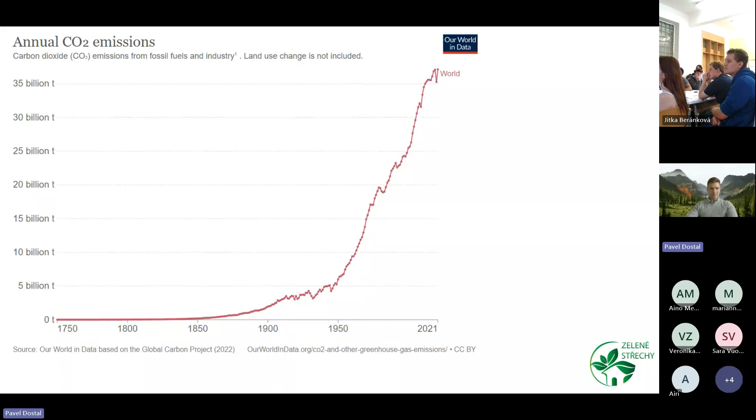So where we are right now, we are at a rather unfortunate point of time in history, where we realize how much CO2 emissions we have actually pumped into the atmosphere. And we realize that it's not sustainable. It cannot go like that. We're already seeing consequences. There is a 99.9% consensus of science that the CO2 emissions are human-made and are contributing to climate change. Although we might still be hearing some voices, especially in our country, which try to object to this, there is a really strong consensus.

And the green roofs, just like any other plants, can actually sequester carbon and can help us using low-tech solutions, using natural solutions. They can help us get back on track, and we desperately need that.

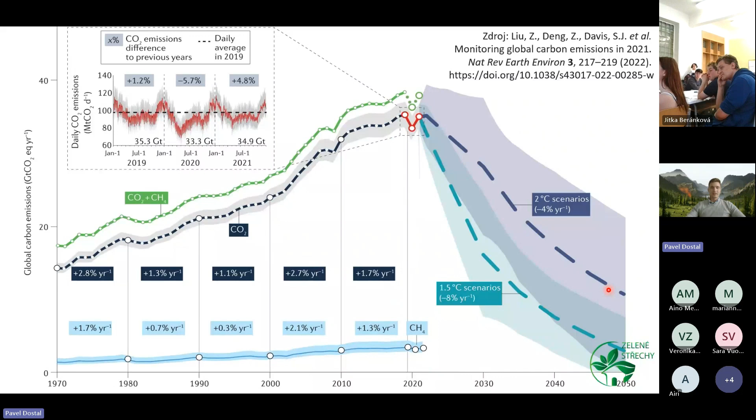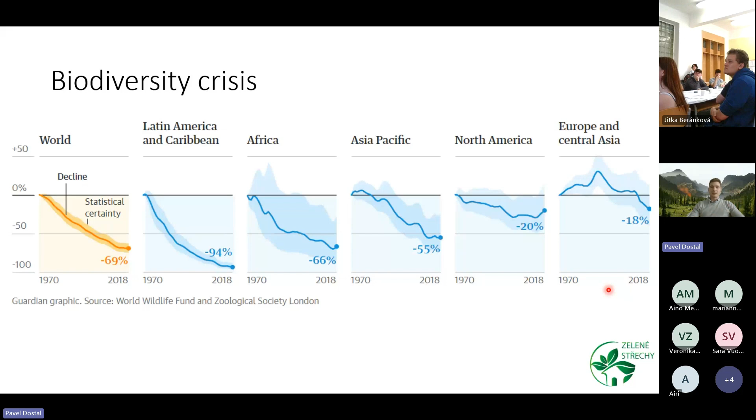So the climate crisis is not the only one that we're facing. We're facing also the biodiversity crisis. So the loss of biodiversity across continents in the world, in some continents more severe, some less. But here again, green roofs and green infrastructure can help us address this topic, because we can specifically create habitats which we know are being destroyed in nature, and we can compensate in the built environment for that, and also in the agricultural land, but I'll focus on the urban environment right now.

Now, for some of us seeing these pictures, these charts, it may seem a little bit heavy, and we almost feel anxious. But I'd like to know how you actually perceive this, because everybody has a different perspective on this, and I've asked this question a number of times at different venues and different audiences, and I'd really like to know what your opinion on this is. So if you can use your Menti again on the smartphone, and here I see that I have not translated it actually.

So anyway, those of you who want to vote, just feel free to let me know, and we can see some statistics there. And in case you don't understand the answers, which I unfortunately have not translated, sorry for that, we can skip this. So I don't see any answers there, so we'll just skip this.

But I'll give you an interesting observation that I had, because I've asked this question at a landscaping school and to civil engineers, and the future landscapers were slightly more anxious seeing the charts, and the civil engineers were really balanced. So some of them were totally fine and unaffected by climate change, and some of them were slightly worried, which also tells us something about how engaged the key stakeholders are with respect to what we need to achieve.

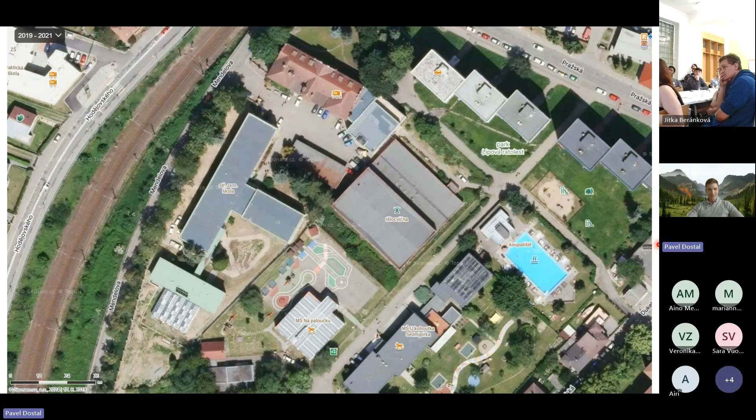So anyway, this is the school, your school, or the school that you were visiting. You can see the environment of the school. You can see how many green roofs there are, how many there are not. And looking at it from this perspective, we realize that the more we build, the more we actually need greenery. The more greenery becomes scarce, and we need to compensate for it in the built environment, which is, I think, a no-brainer, but still sometimes we need to remind ourselves that civil engineering development is not really a panacea. It will not bring by itself what we're looking for.

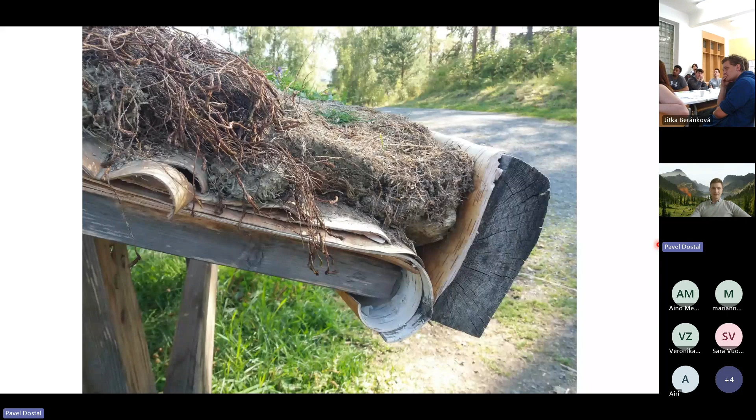Fundamentally, in Norway or in Scandinavia, you have a different rainfall distribution, for example, or even the total volumes of rainwater are different throughout the year. And the temperatures are really different, and the whole climatic zone is totally different. So the result is likely to be very different, and that's why in our Central European climate, we adhere to this idea of a green roof buildup, which is the case for flat roofs.

That's not the case for pitched roofs. They have a different one, but for flat roofs, the vegetation buildup is usually composed of these layers. So the vegetation, hopefully some which is local or typical and long standing. Then the vegetation layer, which tends to be the substrate, and the filter layer, protecting fine particles from entering the drainage and water accumulation layers and clogging the drainage system.

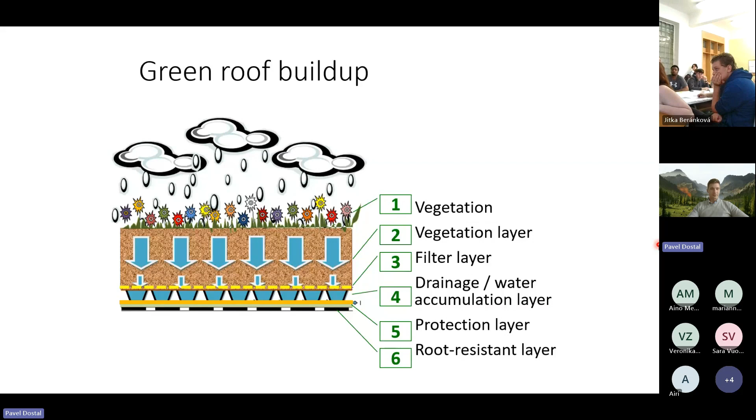And then underneath that, the protection layer, which tends to be a geotextile fleece, and the last important layer, which is done and has to be done by the engineering companies, is a root-resistant layer, which is in most cases the waterproofing. So a waterproofing membrane or bitumen belt or any other really well done waterproofing, because if it's not well done, the plants are going to find out.

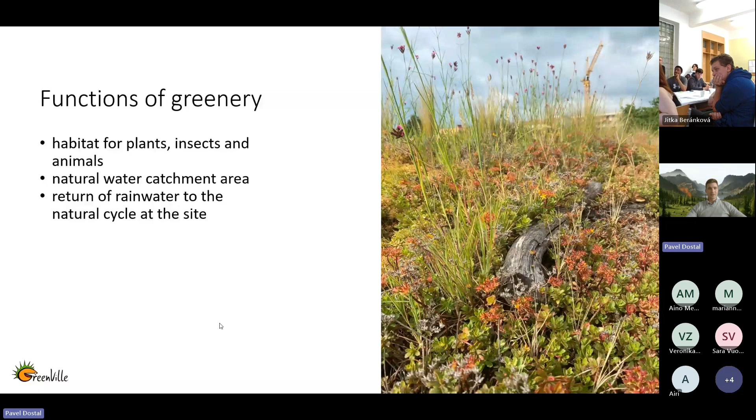So the functions of greenery, you really know this well, and I believe this could be some of the reasons why you are studying what you are studying or doing what you are doing, because the functions of greenery are fundamentally satisfying, contributing to the healthy environment, humidifying the air, producing oxygen that we breathe, trapping dust particles and pollutants.

And the most magical thing about this is that plants are doing this for free, only using the solar energy and water to facilitate most of these functions. So that's really the fundamental difference to our engineering solutions that are sometimes taking the upper hand, unfortunately. So greenery really is the low-cost solution to many problems, and it's the most diverse of all.

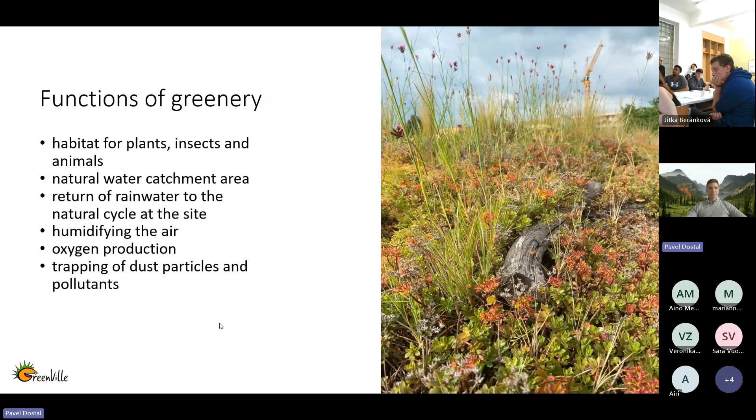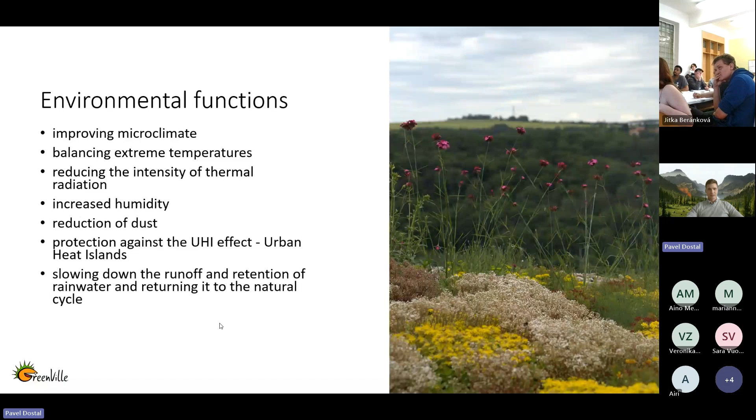So back to green roofs and how they can actually contribute to the environment. They obviously improve the microclimate, balance extreme temperatures, reduce the intensity of thermal radiation, increase humidity in the environment, reduce dust particles, protect us against the urban heat island effect, slow down the runoff and retention of rainwater, and return it to the natural water cycle. And they can obviously create replacement areas and habitat for flora and fauna, and that way they can support biodiversity.

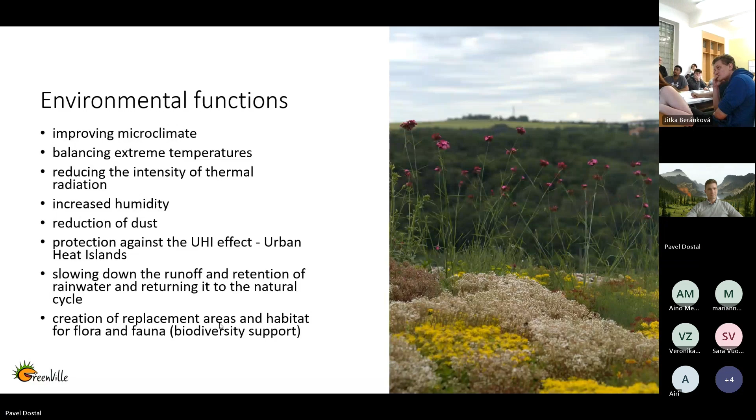Regarding their protective and economic functions, so the protection of the waterproofing against UV radiation and temperature fluctuations, this is a really big thing in the Czech Republic because the most used waterproofing membrane is unfortunately very low performing in terms of UV radiation. So that's the PVC membrane, unfortunately. And when we cover it with a green roof, we significantly prolong its lifespan. And we also reduce the risk of mechanical damage to the waterproofing.

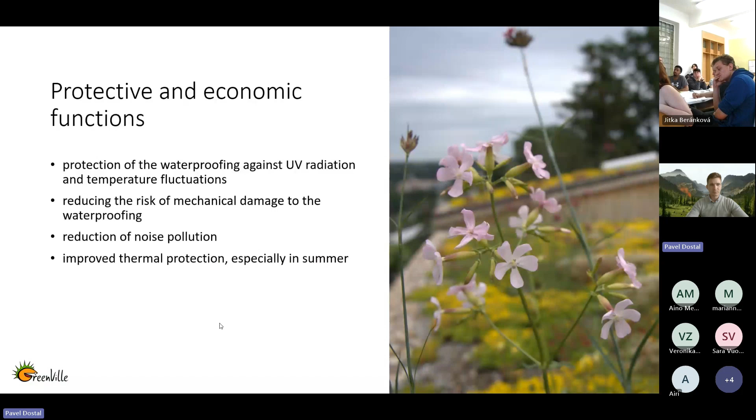We also reduce noise pollution, which is a really important factor of comfort in the building, especially in air corridors. We improve thermal protection, especially in summer, so less cooling. Actually, cooling in summer is beginning to consume more energy than heating in the winter, and that is likely to stay with us for the foreseeable future. So green roofs can really save some money in the summer.

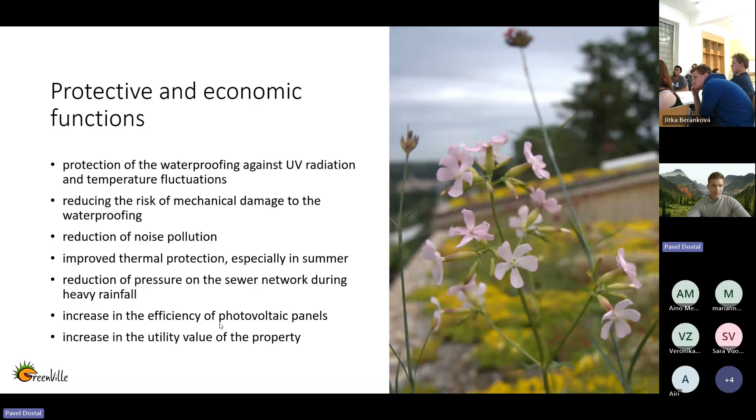Reduction of pressure on the sewer network during heavy rainfall. It's a big thing, especially in the Scandinavian countries. I know that some colleagues from Copenhagen are dealing with this quite a lot, and also in the Netherlands. So especially the low-lying locations can be quite complicated regarding the sewage system. So the less water enters the sewage system, the better. Green roofs can actually make the water stay on the site where it actually falls.

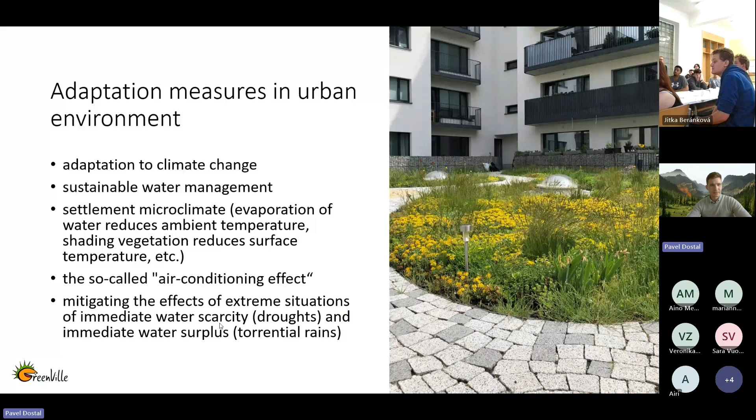And using these benefits, green roofs help us adapt to climate change. Using sustainable water management, they help us maintain microclimate. They are air conditioning measures, and can even be looking like this.

This is a project from Porto. If you've ever been to Porto, you might have been there. If you haven't, do go there because it's really interesting. It's a formerly historical site, which needed to be redeveloped a number of times. So formerly a marketplace, serving certain purposes, but then times were changing, the purposes were changing as well, and the site needed to redevelop.

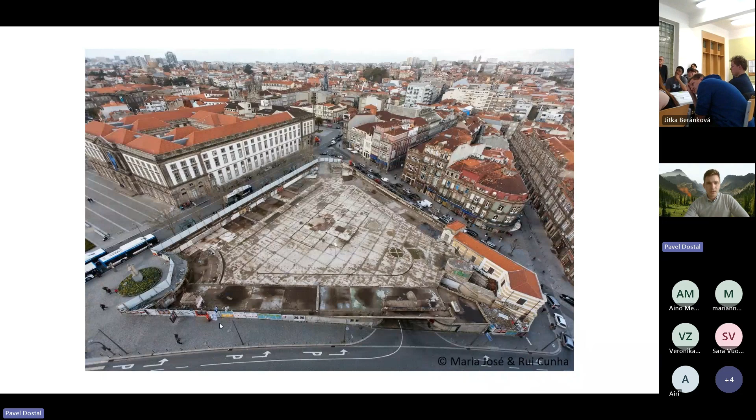And this historical corner of the square stayed there all the time, and the square was changing its looks, so fitting underground garages when there were too many cars in the center, also featuring some shopping areas, some recreational spaces, and eventually it ended up looking like this.

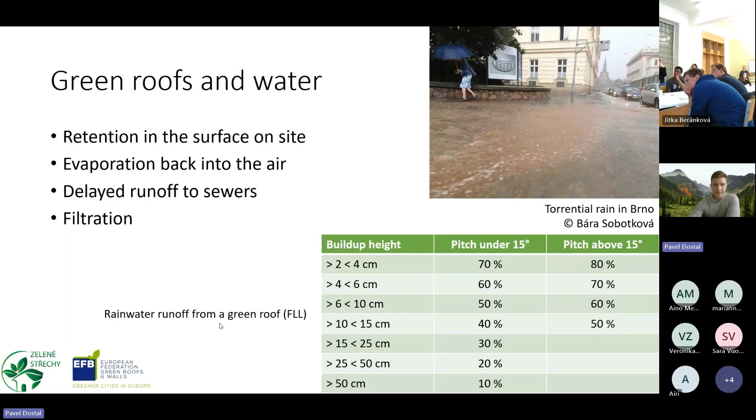So the benefits of green roofs that can actually be felt are visible in this little table. So in the table, you can see that the water retention is actually in direct correlation with the build-up height. So the more build-up height, the more water can be accumulated, and the better for the city and sewage system as well.

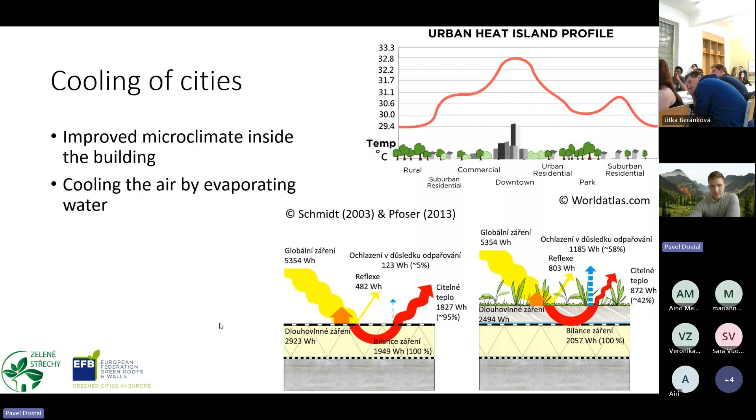So using the evaporative cooling, we get a better microclimate inside of cities, and we also can mitigate some heavy rainfall events when they come, just like this one, which happened in Brno some years ago. I was lucky to be able to film it. But really, the rainfall distribution is changing. We see long periods of droughts, and then really torrential rains, everything falling at once. And the cities are not ready for this.

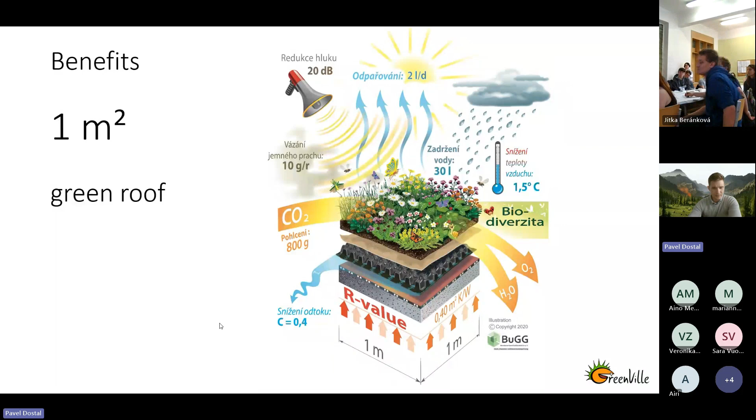So back to the Mentimeter. What do you think delivers most of the functions of green roofs? What is the single most important element in terms of delivering the benefits of green roofs? Again, when a few of you have answered, I will share the results. I'm already starting to get some answers. So I'll share the screen. So this is it. These are your answers.

Great. Yeah, that's the benefits. Actually, I see the answer that answers it all, and that is everything can be possible due to plants. It's the plants that actually deliver most of the functions of green roofs. So the roots of the plants actually pump out the water from the substrate and evaporate it back to the air. The plants attract the pollinators and make it an interesting habitat. The plant leaves collect dust particles and can put them back into soil.

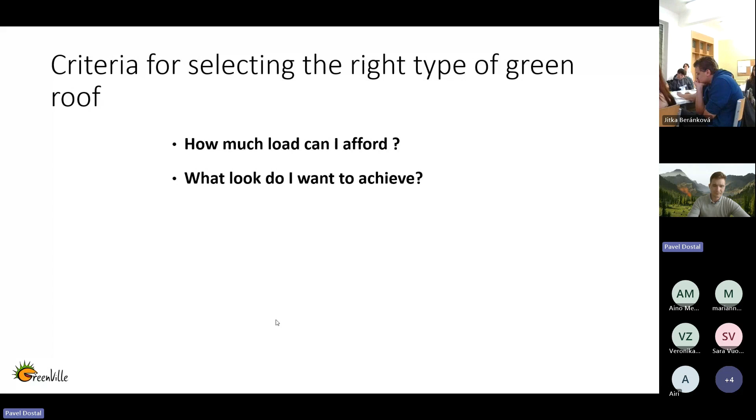Do I want it just to be able to look at a nice green area? Or do I want to utilize the roof? Do I want to use it as a recreational space? In that way, I would probably need to incorporate some pedestrian areas there. So how do I want to use the roof?

How much maintenance can I provide? For extensive green roofs, it's very low maintenance, once or twice a year. Some fertilizing maybe from time to time, collecting some weeds. So it's really very low maintenance, but with intensive green roofs, it's basically the same maintenance as we would have with a normal garden.

And on top, we need to take into account that it's on a structure. So we need to keep water outlets clean so that no vegetation is growing in them. We need to make sure that the water outlets are accessible. That's one of the things that we sometimes see in landscaping designs when they're not done really properly.

We sometimes see that there is a tree sitting right on top of a water outlet, which is not really fortunate because the tree and its roots will be attracted to the water, which will obviously go down into the drain. So there needs to be a cooperation between the civil engineer and the landscaper, also regarding the layout of the elements on the roof.

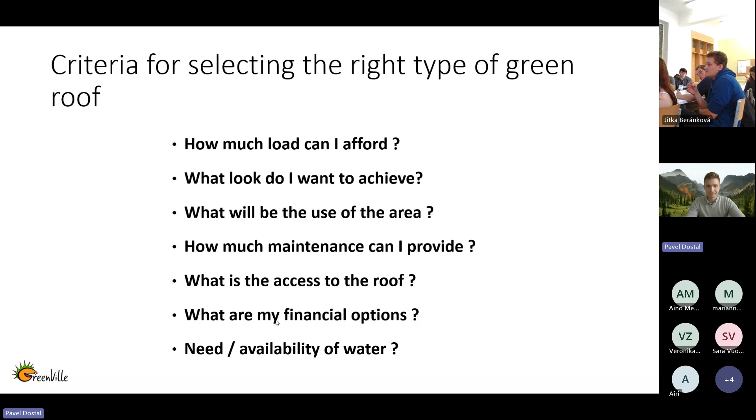And what are my financial options? The more material we install on the roof, the more expensive it will obviously be. And also, as we've already touched on, the need and availability of water. That's crucial because water scarcity is becoming a really serious thing in our climate, and I believe elsewhere in Europe, because of rainfall distribution changes. We need to make sure that the vegetation is actually doing well, because if it's not doing well, it's not going to perform. And vegetation needs water. So we need to think about where we get the water from.

Because I think you are probably familiar with some of the basic green roof solutions, I included some more innovative ones to get more technical. One of those is blue-green roofs, and I believe this is one of the solutions really picking up speed in the Netherlands, for example. The blue-green roof can really harvest a lot of rainwater. It can nicely hold back the surge of torrential rain and slows down the runoff.

And it retains the water on the roof for plants, and that way, from the perspective of a civil engineer, it's a very useful way of disposing of water. Civil engineers still like to dispose of water in the Czech Republic. That's the status quo. But actually, it's about using the water so that it can fulfill more benefits and pay us back a bit. So how do blue-green roofs actually look?

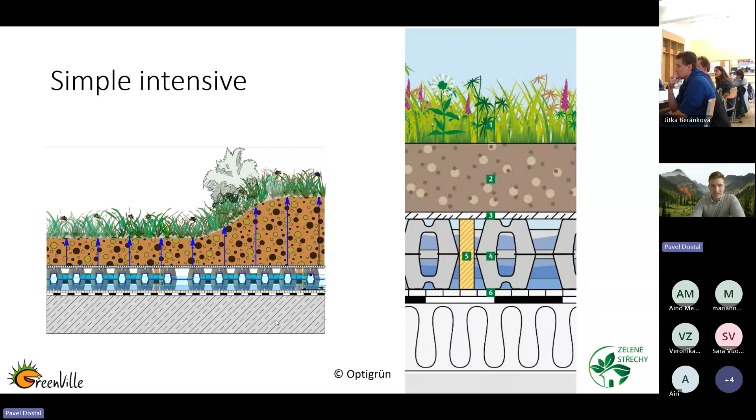This is one example from a company called Optigrün. I don't want to advertise them too much, it's just that they have some nice pictures. The difference to a classical extensive or semi-intensive green roof would be the water reservoir, which is really large. And this picture is from another company, this time Bauder. Also a very similar thing.

Now the interesting thing about the blue-green roof solution is that the water outlet is regulated. The discharge of water into the drain is regulated either electronically or using a built-in pipe with a certain diameter. That way we can accumulate a lot of water on the roof, and it needs to be accessible to the vegetation. The vegetation will be able to pump it out, cool down the climate, and provide all the benefits.

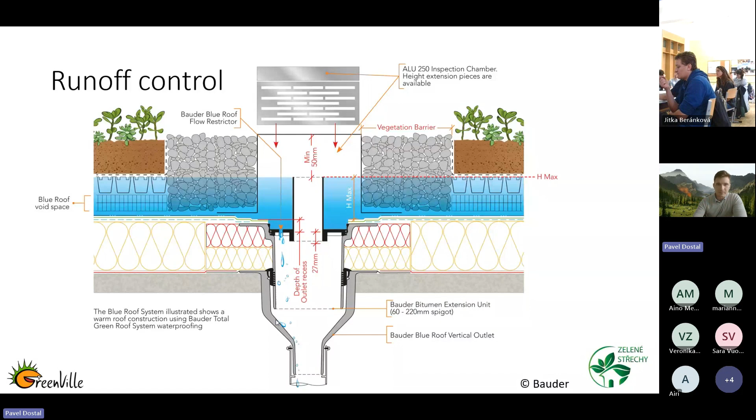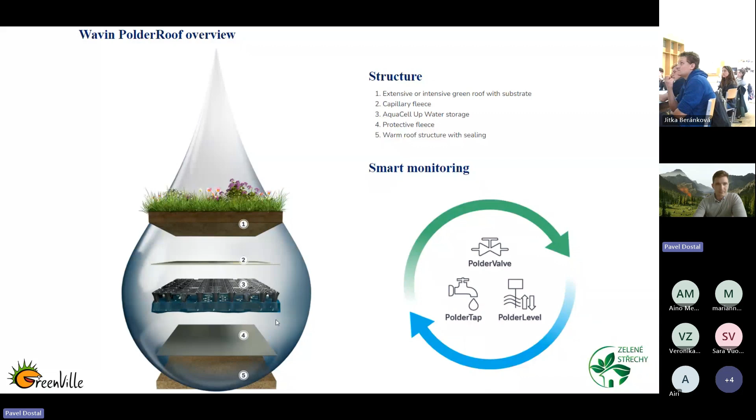And another solution, it's the same solution, but from another company called Wavin, or Wawin, I don't know. It's pronounced differently in every country, I guess.

What are the prerequisites of blue-green roofs? So the single most important is that the roof has to have a zero pitch. So that is, it needs to be perfectly flat, because some of the blue-green roofs actually retain a permanent layer of water. Some of them retain a temporary layer of water, and obviously the layer of water needs to be even on all of the surface of the roof. So that's why there needs to be a zero pitch.

There's a little thing with the Czech market, because this is not the way that roofs have been done historically. Civil engineers like to use a little slope just to make sure that the water actually flows away. And that gets in the way of blue-green roofs here, but it doesn't have to be a problem actually. The most important thing there is the waterproofing, and also the structure, the ceiling needs to be really flat, so no puddles, no deflections.

But the single most important thing is the waterproofing, because the water will exert a certain amount of pressure on the waterproofing, and if there is a leak, then you'll have a ton of water literally in the roof, and that's a serious problem. So the waterproofing needs to be pitch perfect, really, for blue-green roofs. I would also recommend some leak detection system for that.

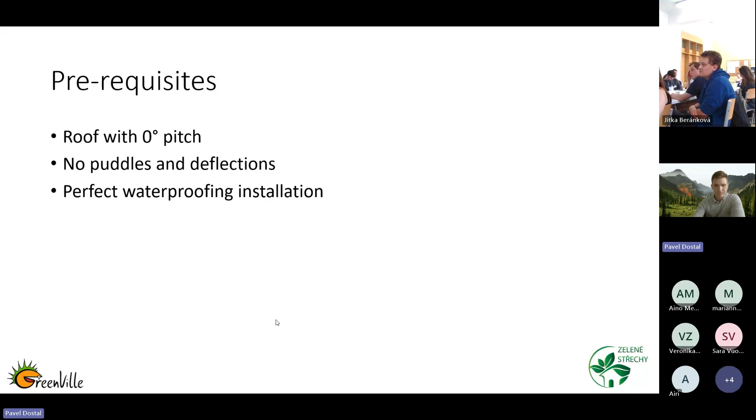There is a nice project from Berlin on top of a psychiatric treatment hospital. And this green roof actually serves multiple purposes. It's an intensive one, a blue-green roof, and it is maintained as a part of the therapy. So there are therapeutic sessions actually on the roof, and as part of the therapy, maintenance is done.

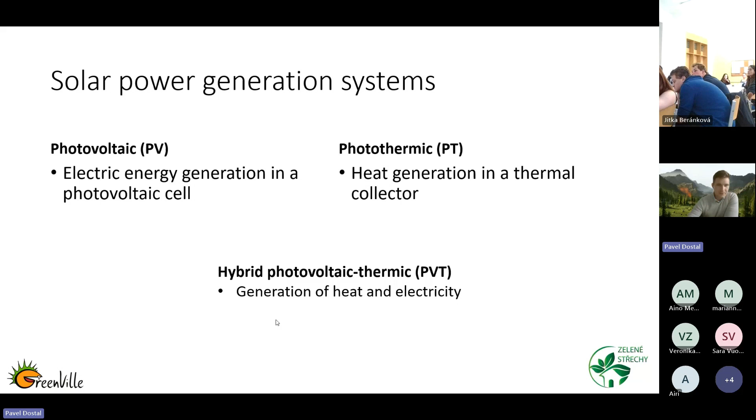Some of the other rather innovative solutions are biosolar roofs, or solar green. You know that electricity or thermal energy can be generated using the energy of the sun, or even both kinds of energy at the same time. And all of these systems can be fit together using green roofs. So this is the solar installation, this is the solar thermal, so photothermic installation, and this is both a photovoltaic and photothermic panel.

So the benefits of doing this is that we get all of the green roof functions, and we also get all of the PV functions, and we also get something extra. So it's this weird equation 1 + 1 = 3, because what we get extra by combining green roofs and photovoltaic panels, for example, is a better habitat on the roof, because it's more diverse. We get some shady areas with permanent shade, some semi-permanent shade, some sunny areas. So that's already 3 kinds of biotope on the roof, which also fosters greater biodiversity.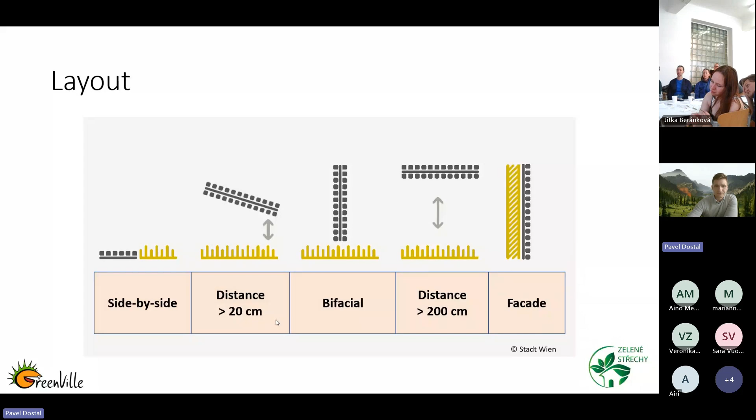So that's great. And because of the cooling effect of the vegetation, we also get a slightly increased yield of the photovoltaics. So that's a nice side benefit as well. So on one area, we can get multiple uses, and it's a really win-win solution for the future. And there are a number of ways how to install green roofs and photovoltaics. It can be done well, or it can be done wrong as well.

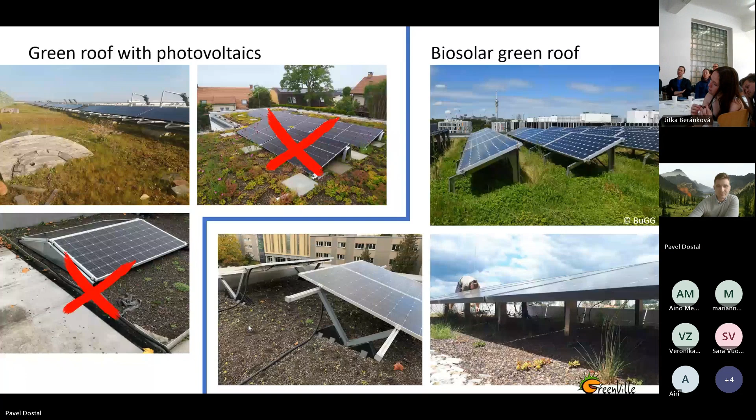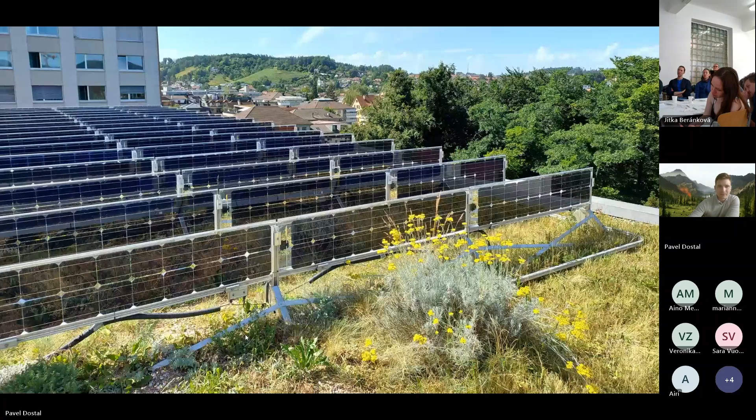We can also think of green roofs as biodiverse green roofs, fostering biodiversity in the city. We should maybe use the typical plants of the area, and we should make sure that the green roofs deliver for animals as well, so small insects or spiders, but even birds can have some nesting opportunities on green roofs.

And what we have learned from many biodiversity studies on green roofs is that diversity stimulates abundance. So the more diverse we actually create the environment in terms of habitat, in terms of plants, in terms of designs, shading, and all sorts of things, the more species we will actually enable on the roof. And we also know that the more species, the more resilient the roof is. So that's another benefit.

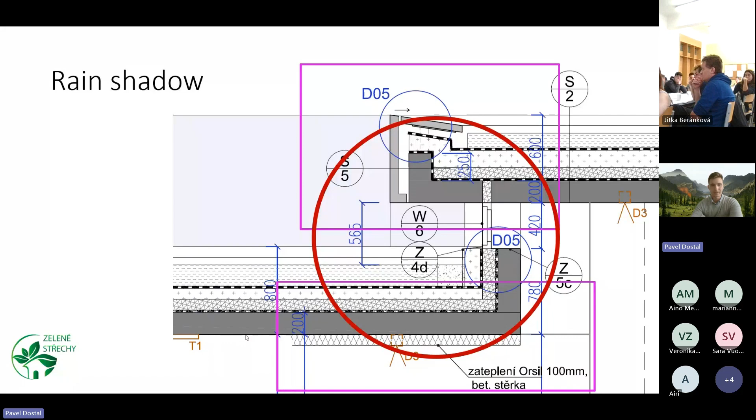And if the waterproofing is leaking, the water is going to go there. If the water goes there, roots will go there as well. They will expand the leak, and obviously the insulating layers will be filled with water. We'll get some leaks on the inside of the building, and all of the roof will need to be reconstructed. No one will be happy about it. It's a lot of work, a lot of costs.

From our experience, the costs of redoing a green roof completely are basically 2 to 3 times the installation costs. So it's good to avoid this and really test the waterproofing before it's covered. So when the waterproofing is done, it's a good habit to invite some third party who will test the quality of the waterproofing using various methods, certify that it's done right, and then it can be covered. So that would be a nice practice to have.

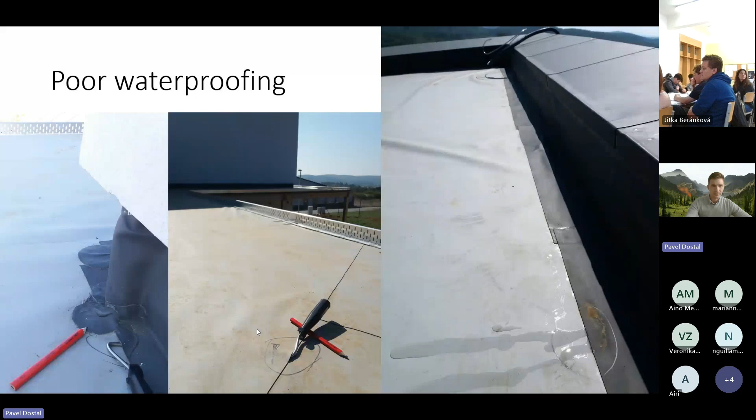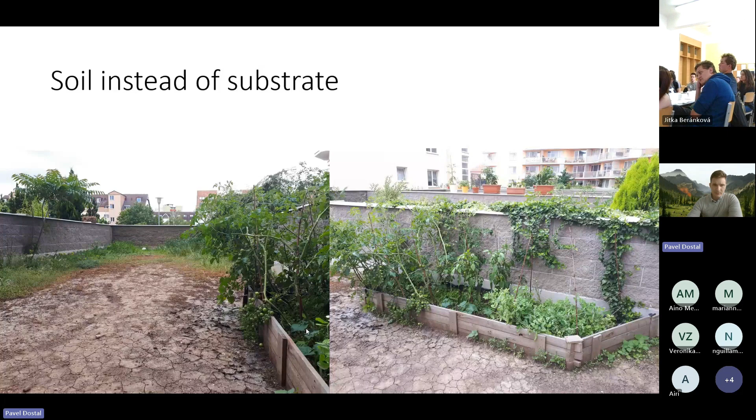We have our green roof standards, also in Czech, which can be translated with DeepL maybe. As of March, we also have a technical norm for green roofs. That's something we have done in cooperation with the civil engineers, because they are also interested in the topic of greening up buildings, and it's a big success for the industry, because it will enable civil engineers to really design green roofs the way they should be, so that they deliver for the long term.